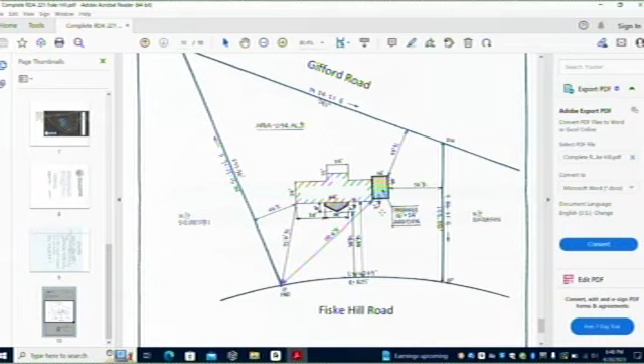Jerry, is there anything you want to add about the project here? No, I think you covered all the bases. Just all the spoils are gonna stay on site, like you said. It's a full basement on the right side and then a frost wall in the front.

Any comments from you, since you were on site? I think it's a good project.

Anybody in the audience like to speak to this project? I just wanted to get a glimpse of it, and I appreciate you bringing that up. That looks like a nice little project.

I'd like to make a motion to close the public hearing. Second? Second. Any discussion? Hearing none, all in favor? Eric Gaspar in favor? Carsten Stuber in favor. Roy Bishop in favor. Ted Winglass in favor.

With regards to the request for determination of applicability at 221 Fiske Hill Road, I'd like to make a motion that we issue a determination of a positive number 5 with the conditions, a positive 2B, and then a negative number 5.

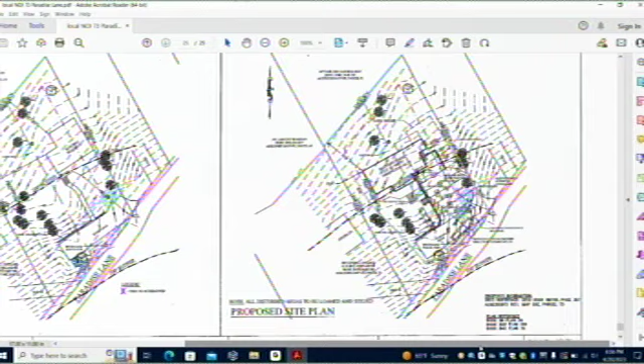The existing house is being removed, and a log home will be put in its place. The home will be moved westerly, centered on the lot, with an access driveway coming in on the southeasterly side off the existing access on Paradise Lane. The house is serviced with municipal sewer and a private well. The private well on the lot will be utilized, and the new home will connect to the existing municipal sewer in town.

There will be 3 trees removed on the westerly side of the property, big pines marked in the field near the most westerly portion of the house. Outside of that, the rest of the trees will stay as is, and all disturbed areas will be loamed and seeded. So the impact here is basically a plus, since the house will be moved to conform to all zoning regulations within the town of Sturbridge.

However, the lot itself does not conform to zoning under the regulations. Therefore, after the property is reviewed by the Conservation Commission, and assuming an order of conditions is issued, we would have to go before the Zoning Board of Appeals for a special permit because of the lot frontage and area. Any questions, I'll be happy to answer.

All right, Becky? Great, thanks Lenny. We went out and did a site visit, it was staked out, and we were able to see everything. We did note one very dead tree by the road that was marked, so we'd modify it to say 4 trees can be removed for this approval. One concern with this property, especially being across the lake, is runoff, especially with the steeper slopes there.

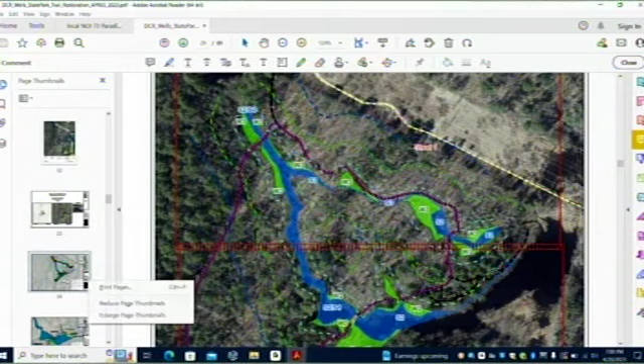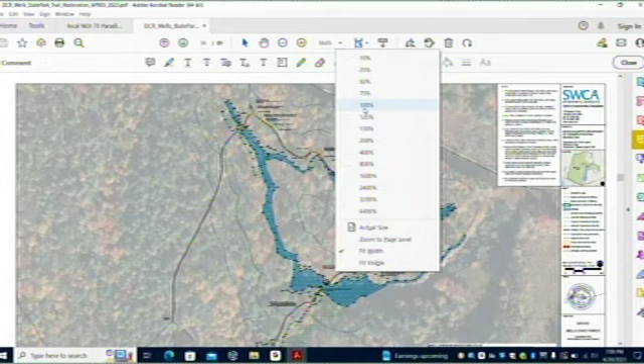Can I annotate, do you know? I don't think so with this. Okay, right at the southern end, see right before that orange polygon - it's hard to explain. Let me pull up the plans and then I can point out with my cursor that spot. That might be best, and then I'll explain what the proposed project is. I can zoom in here. Yeah, if you just zoom in. So there's a wetland crossing, see where that little finger of a wetland comes up off of the... maybe if I just start in one point here, it's just gonna take a second. Sure, I got it.

Just a little slow, plans are a little cumbersome. Yeah.

The trail crosses a wet area, so we're proposing to put down a puncheon to reduce soil compaction and trail braiding. When a trail crosses a wet area, hikers tend to go around it, which increases soil compaction and leads to trail braiding. We're trying to encourage trail users to stay on the trail by putting down a puncheon, which will go right over one of the wetland crossings.

That's exactly right there. It's 6 feet long by 3 feet wide, so that will meet accessibility standards.

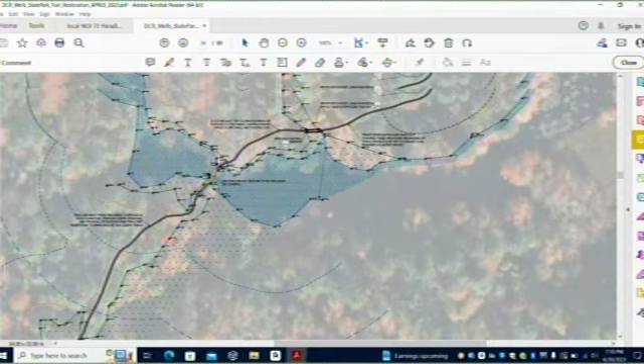There's also a stream crossing if you go a bit further northeast, crossing stream 3. There's an existing stream crossing there, and DCR wants to put in another puncheon, basically capping it, so there's no impact to the bank, land under water, or bordering vegetated wetland. They're just going to put a boardwalk right over the existing crossing.

Yeah, exactly right there, and again that'll meet accessibility standards. The total temporary impacts associated with these trail improvements, which is only within the existing trail tread, totals 6,010 square feet.

However, in addition to what they want to do within the existing trail tread, we're calling permanent impacts for 55 square feet, and that's all within riverfront and buffer zone for the bylaw.

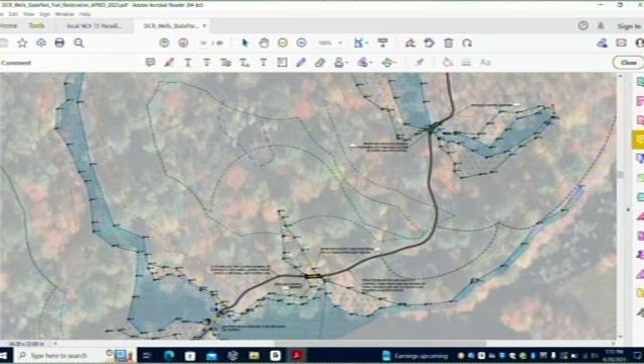So the 55 square feet is a maximum extent, most likely it'll be less than that, and that includes a 15 square foot wheelchair turnaround area at a steeper part of the trail. That's again for accessibility standards, so if somebody in a wheelchair is climbing that steeper slope, they can take a bit of a rest. Everything's going to remain pervious, there's no new impervious surface area.

There's no new impervious surface area. It's just going to be a little bit of a widened bump-out part of the trail.

We're also proposing 4 areas of drainage improvements where there's some existing trail erosion. If you look at this section of the trail with the yellow outlines, the trail follows right along bordering vegetated wetland and streambank. Heading toward the northwest, the right side is a steep slope, so runoff comes right down that slope and down the trail, potentially heading into resource areas.

So in order to protect adjacent resource areas, we're proposing 4 drain dips, each a maximum of 10 square feet, probably less. We'll spec that out in the field and use field materials to the maximum extent practical, but we estimate at a maximum this will be a 40 square foot permanent impact to riverfront area and buffer zone relative to the bylaw.

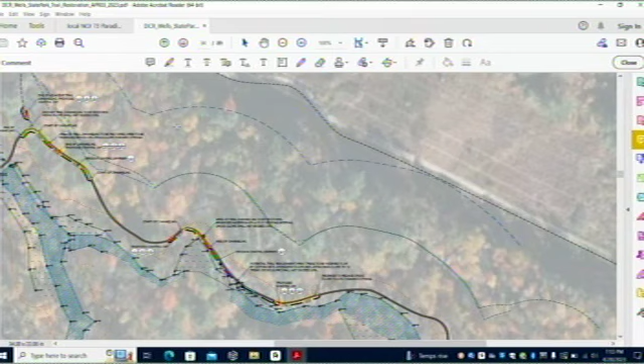Becky, any questions? I don't have any questions. Kristen and I had gone back and forth a little bit previously; I had a couple questions about the project that she was able to answer.

I think it's a good project, a trail improvement project. Like we said, we're still waiting on the DEP file number and comments, and waiting for Natural Heritage comments, so we do have to continue it. I really like the boardwalks they're using over those existing structures, which minimizes any direct resource area impact to the wetlands—I think that's a really good idea. They have an O&M plan included for maintenance, so I think they've done a good job with the improvements here, and I don't have any concerns.

Like I said, we just have to wait, so we'll have to continue this out, and that way if we have any comments to incorporate from Natural Heritage or DEP, we can get answers on those.

I don't know if anyone else has any. Nope, I'm good. Ted? Roy, any comments? No. Looks like a good project, and for the right reasons.

That's good. Continuation? Anyone on the public? We do have a couple people on GoTo here. Anyone want to comment on the project?

I want to comment, that was one of the nicest applications I've ever gotten since I've worked here. Yes, it was very well done, very well thought out, and makes my job very easy. Good job, actually Kristen. I did share this with our Trails Committee because I thought it was really useful for them as they're starting to think about their planning and what other agencies are doing with their trail projects.

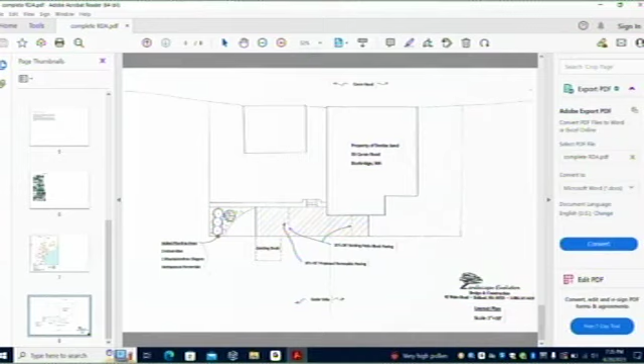So he's going to come back, speak to the client, and come back with a revised plan. And we'll get that to them and look for a continuation here to the next meeting. All right, let's see — Roy, anything? Yep, looks good to me.

Anyone in the audience like to speak? Okay, so I guess the only question I have is, with these O&M plans, right?

This is an improvement if this is maintained. How do we ensure that these O&M plans are enforced?

You live out your life in Sturbridge. Oh, great, just start walking around, take a boat along, all right. Awesome, well, I love it here, so that works. Okay, I guess, another question — honey, if you're watching, we're staying.

We have a 25-foot no-touch. And basically, we are putting cement or blocks of cement across the whole front of this with a little bit of an exception. I don't have any problem with this plan from where we're at, but we really have to discuss as a committee what we do with the 25-foot no-touch.

Well, I mean, I guess in my brain, if we go from impervious to pervious, that's a net improvement.

If we can get the natural buffer there, that's a net improvement. Or we just leave it as is, but we still have that pervious stone there, that's not going away, and we don't get anything else to help protect. Your point is correct, but you're adding block, reducing pervious to impervious.

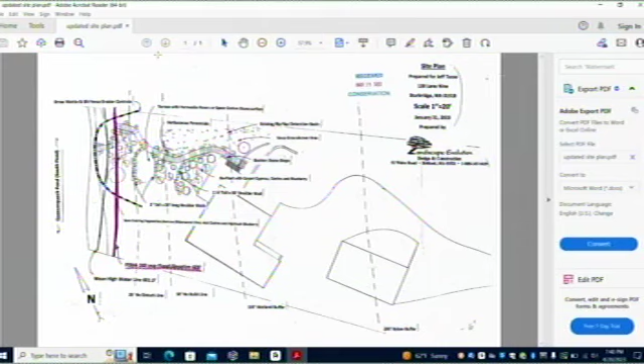So I think since the site visit, one thing that's been determined is that this retained area or terrace created right here is not within the 100-year flood elevation. And that area was actually going to be a balanced cut and fill anyways, permeable with spaced Goshen stone. We're going from the current timber stairs to Goshen stone stairs with spaced Goshen stone landings in between, pretty much all the way down. It's some 60 stairs, it's a lot of steps. Basically, Jeff would like better access to the water, and I think it's going to be a very nice aesthetic improvement as well. I think it's easier to walk next to the stairs he has currently than it is to walk on them.

At the site visit, we talked about there being a lot of bittersweet there, and Ed mentioned that if it's within where I'm doing the work, we may be able to remove some of that, but in the lower areas we're not going to go crazy there. At the same token, I'm looking to add some vegetation, maybe some clethra and blueberry bushes. I'd like to see those win the war with the bittersweet, but there needs to be something there battling it.

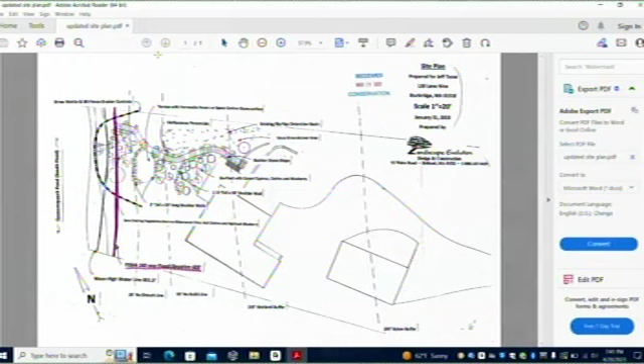This right here is Jeff's edge of his deck, and it's very steep, and he does have erosion issues, so he'd like to put in a small, 1.5 foot tall boulder wall, and then plant it. It would be sort of a mixed planting with some evergreen, but also some natives, things like clethra and blueberry again. Overall, along the path, in areas that are disturbed, I'd like to add some herbaceous perennials, again maybe to compete with the bittersweet. Any questions?

Becky? All right, so this has been continued out a little bit to get some additional information which we needed to understand what the impacts were going to be on site. Since then, DEP has issued the file number, there were no comments with that. Natural Heritage reviewed this under the Endangered Species Act, they had no conditions or comments, and issued a no-take determination. They're keeping that patio area out of the bordering land subject to flooding on the site, and the only impacts are within the existing footprint of where those stairs are now. So there's no impact to flood storage area associated with the project since they're taking out and putting back in the existing footprint. Minor bank impacts associated with these steps down below, but again, those are in the footprint of the existing steps, about 6 linear feet.

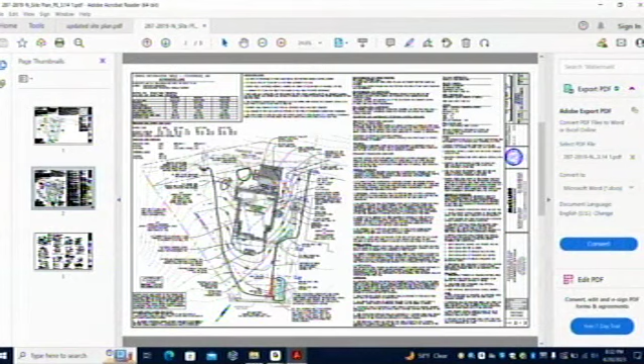So just quickly, I provided this response letter on March 27th. If you can bring up a copy of the plan, just to go through quickly, the commission had some questions regarding the wetland delineation. It was completed I think last fall, mainly based upon the presence or absence of hydric soils, because the vast majority of the wetland boundary is right at the fringe or expands out into that lawn. So when you've got areas with disturbed soils, you focus and look at the colors in the soil. The colors in the soil will provide the long-term hydrology.

So that's what the original wetland delineation was based upon. The soil colors are long-term indicators of hydrology. You go through the analysis, determine if those colors key out to be a hydric soil or a non-hydric soil. So that's what the original delineation is based upon. During the site walk, there's a well right here.

The house hadn't been used in many months. There was some water trickling out of this well and flowing, saturating an area of the lawn right through here. What were the perforated pipes coming from the well for?

There's one, I don't know if it's perforated. It's perforated. But there's a pipe somewhere at this well, and I think it somehow flows down, and there's a discharge somewhere down here. So it's a drainage pipe? That's what I believe it to be. Yeah, some type of drainage pipe. Similar, there's a drainage pipe here.

Based upon the commission's concern, I conducted an existing test plot down here, I think it's at A5 or A6. Based upon the delineation, we provided the BVW field data forms, and then from there I went up and provided 3 additional test plot locations. I provided the soils information, so we've got the soil color, texture, and depth to areas.

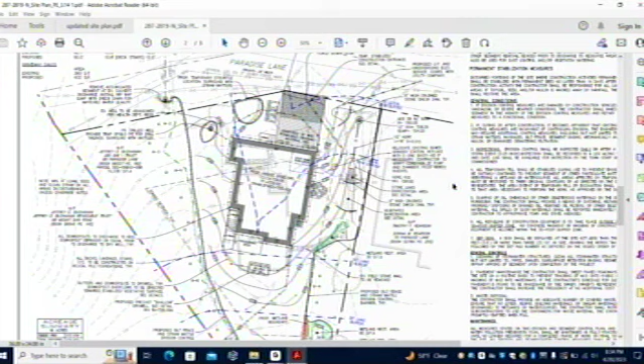There's absolutely evidence of seasonal high groundwater. For instance, test pit 2, which I think is right in here, shows the colors don't key out to a hydric soil. However, you've got redox features within 5 inches of the soil surface, which indicates seasonally you've got prolonged saturation within 5 inches of the soil surface. But it's not there long enough to create a hydric soil or key out as one. So I provided that information.

Part of the problem with this particular site, I think, is historically all the water from this whole street comes down, and if you look, it flows right down and right into essentially the front door of this existing house.

So one of the important things, rather than just let that continue to flow like that, we've provided stormwater improvements. We're going to capture that water in a deep sump catch basin. They've actually tucked this pipe up a little bit more and created a longer vegetative bioretention swale.

One of the real key aspects, which we've really pushed on Jeff, and he agreed, he said it's going to cost me extra money, but the enjoyment of this property is the lake. So he agreed to install these stormwater improvements. He's got a deep sump catch basin here, swale here. We're providing some revegetation of areas within the existing lawn here and here.

At Becky's request, we kind of reconfigured this to keep water from draining and going behind those stairs. That was a conversation that we had early on, and Becky suggested this.

I didn't say to fill the wetland and replicate it. I said you could do things, you could grade the yard to help kind of keep water flowing in that direction. I just want to be clear, I didn't say to fill the wetland.

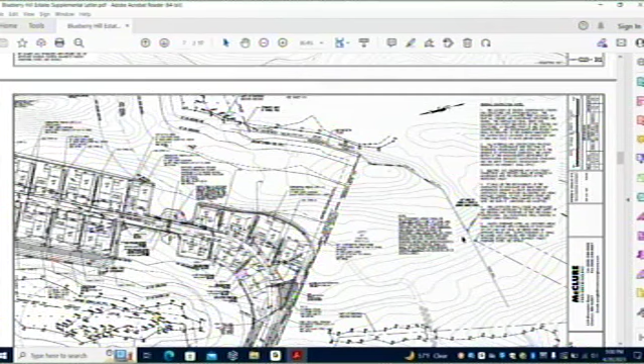So at the end of Road B, we made significant changes. This is the vernal pool, and the roadway continues up like this, and this is the spur road. The wetland system in that valley continues here, and this is where the vernal pool starts to pick up in this location. Again, this is an intermittent stream system where there's spotted salamander breeding activity within the flooded confines of the stream channel, basically any areas where there's been uprooting of trees and little pockets of standing water. But a lot of the egg masses just rest on the bottom of the surface, just below water levels.

So what we proposed for revisions here: the retaining wall along the back portion of those two lots is removed. We've eliminated this lot altogether and significantly revised the grading here in red to pull everything closer towards the cul-de-sac. This unit has been reduced in size, the garage has been eliminated, and it's been shifted closer towards the cul-de-sac.

What that effectively does is take all the permanent alteration outside of the 200-foot vernal pool buffer zone. So there's no permanent alteration within the buffer to the northerly A-series vernal pool. The rain garden, which you see here in red and which is going to be finalized, has been sited outside that 200-foot buffer. There's a little bit of regrading that will extend into the 200-foot zone, but that is all proposed to be revegetated and left to naturalize and become fully wooded.

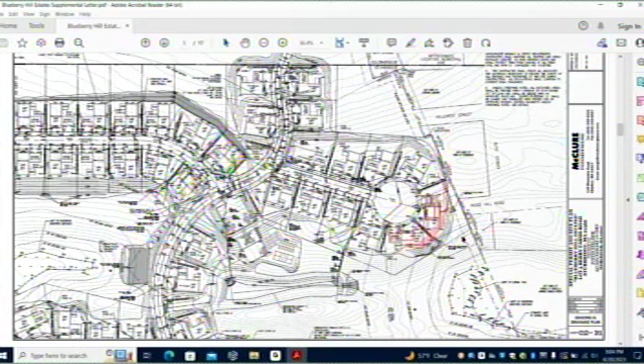We are also proposing to add another tree per lot to be planted. That brings the total of planted trees to 134.

And we feel that the proposed revisions address the commission's comments and feedback, and significantly reduce that cumulative disturbance in the 200-foot buffer.

I don't know if you want to add anything, or turn it over. No, questions.

Just on Road D, I did a quick measurement. The original grading that we had — where that original retaining wall was — was 105 to 110 feet away from the vernal pool. With the new grading, we're about 140 feet.

And from 105 to 140? Okay, all right. So 30 to 35 feet. Yeah.

How big are the lot sizes again? Are they quarter acre? 7,500 square feet, 75 feet of frontage, 100 foot depth. So that's quarter acre? Yeah, roughly. And the whole back of those—

Even the regraded areas would be put into the declaration restriction for long-term protection. And you're counting the back of those lots as part of the protected area in the 11 acres? Well, actually, not in that instance, because that number hasn't changed. I think we may need to revise the open space based on that, so it's going to slightly expand a little beyond 11.02 acres, now that you mentioned that.

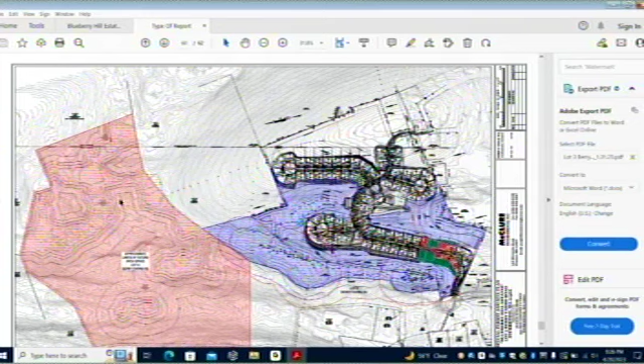Through conversations with James, he said, well, would you donate this part of the blue on your Lot 3? I said, for consideration at a later date, not right away with all of the red, because we'll be working in here and doing grading, obviously not right in the blue. So if we did ever donate this blue area to the state, James believes they would take it as long as we gave an easement, just a 10-foot wide walking easement.

So people could come and park on Berry Farms Road and then access this land all the way through here. So there would be no parking lot access for residents? They would come in wherever they come in now to the state land. Actually, when we were up there doing the test pits, I ran into a gentleman who said he parked at a gate in Southbridge, comes down through the Commonwealth land, is how they access it now.

So with this red piece, that's how they would get to it. If we did eventually donate our blue area to the state, which we're open to doing at a later date, that's where the state would require we give them a 10-foot walking easement right here. But we're not proposing any formal parking or trail system at this time, it's just going to remain undisturbed. I don't think the state, we're talking with James, wanted any type of formal trails, he wanted to really keep this area open for passive hunting.

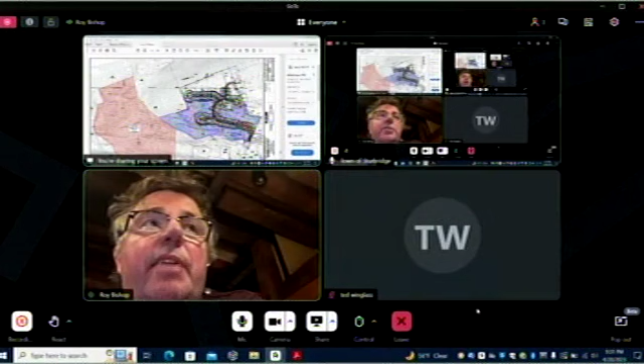Pilot error. All right, so I agree with the comments, great strides, thank you. My concern is, can you hear me okay? A little louder if you can. Okay, so my concern is the precedent that we may set with the 67 homes that are there. If any one of those homeowners came with an application to build, I think we would take them to task for where they're trying to build. I think we're too close to the buffer. That's my big concern. So of those 67 homes, how many are inside the buffer, whether it's the vernal pool or the stream or whatever we're trying to protect? And the other thing is you have some extra land there. Why can't we spread that out a little bit more? Take it out of the protected areas.

Roy, I just had a question to that comment you made to the applicant. They're not going to own the land, is that right? They're going to own their unit and not own the land that the unit sits on, isn't that correct? Yes. Yeah, it's just a condominium proposal. Do they have rights to modify their lots, to answer your question? Because I don't know, you raised a good point.